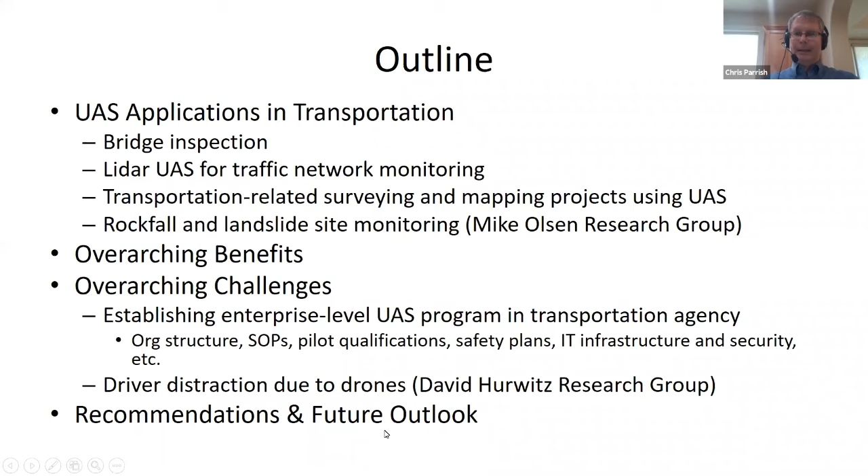Okay, another thing a little bit different about how I organize this presentation today. Usually I leave the list of grants to the very end, but I wanted to bring it right up front in this presentation. And the reason why is this.

Cole and Yinhai both mentioned that we did a multi-institution PacTrans project. The work I'm going to be presenting is actually a whole series of projects, and this is actually only a partial list. It doesn't include, for example, the projects of Michael and David that I mentioned just a second ago.

But the main reason I wanted to move this up front is I wanted to talk about the top line here. So right after I started here at Oregon State University, I started in 2014, and I think this was maybe the second grant proposal that I submitted.

It was with a colleague, Dan Gillins, who's now in NOAA NGS. We were very fortunate to get at the time a PacTrans small project, which was one of the PacTrans research types that Yinhai mentioned. This was really fortuitous, very appreciative of that.

Not a large dollar amount, but it allowed us actually to jump into UAS. This was even before the Federal Aviation Administration released its Part 107, so we were operating under something called a COA at that time. But that initial small project then led directly into several follow-on phases of research.

So about 6 years too late, maybe, I just wanted to say thank you to PacTrans. Since this is a PacTrans webinar, I wanted to express my appreciation for that first award all the way back in 2015 that kind of jump-started all of this work. And I would also encourage PacTrans to keep doing what it's doing and making those small projects available to new faculty.

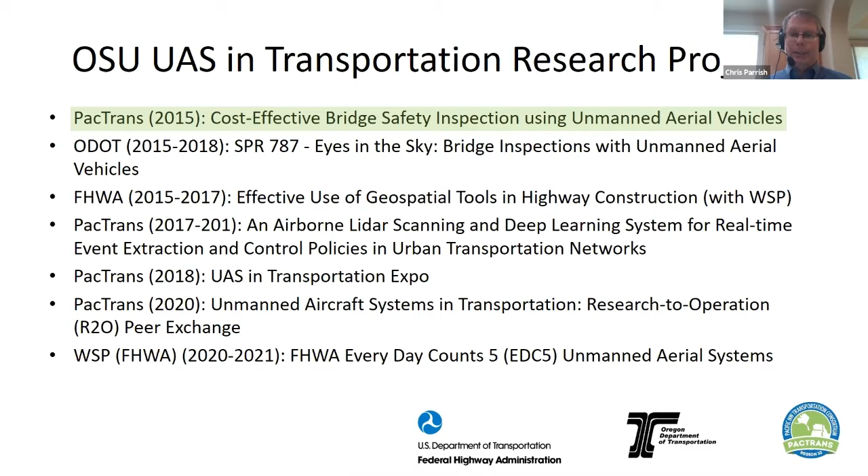Okay, so back to these different applications of UAS. The first one that I want to talk about is use of UAS for structural inspections, and in particular, I'm going to focus here on bridge inspection. So a question you might have right off the bat is why use UAS for bridge inspection?

But if you can reduce some amount of lane closures, traffic control, use of bucket trucks, snooper cranes, that can lead to potentially a huge cost savings over the course of a year, and potentially also some safety benefits as well.

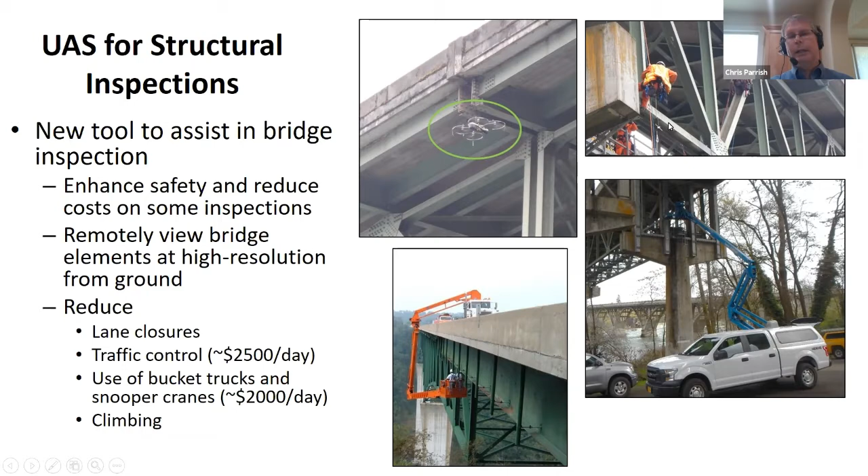By the way, just very quickly, the particular bridge inspection that we see here, this was a great one. This is Winchester Bridge down near Roseburg, Oregon, and not the image showing the snooper crane down at the bottom, but the other three images, those were all taken on the same day. So if you see our inspection UAS there, we were acquiring data on the same day that an ODOT crew was there on a different span, physically climbing on the bridge and using the bucket truck.

So when we first started this work, which I said was all the way back in 2015, which seems like quite a while ago now, one of the first things we did is we looked at what are the requirements of a drone, of an inspection aircraft, for doing bridge inspection type work. The particular aircraft that we see here is actually now obsolete, you can't even buy this anymore. But a lot of the characteristics of this one still remain today, characteristics that you would want to see in an inspection aircraft, and I'll talk about them briefly.

One of them is that you really want to use multi-rotor aircraft as opposed to fixed wing aircraft or gliders, things that operate more like a conventional airplane. Those ones tend to be good for acquiring data over large areas efficiently. But if you want to be able to hover in place up near the bridge and have the inspector zoom in on a particular element and capture, look at that from slightly different angles, maybe by tilting the camera, you really want an aircraft that can hover.

Also, vertical takeoff and landing is important. A lot of times in doing bridge inspections, you're operating in tight spaces, so you don't have a huge amount of room to take off and land. So things like the quadcopter shown here, or other multi-rotor aircraft, are really helpful.

The second thing is obstacle avoidance. The main goal here is you really just don't want to crash into the thing you're trying to inspect, right? You don't want to fly the drone into the bridge you're inspecting. Whenever I say that, people laugh. It sounds so obvious, kind of like, duh, right? But that can actually be tricky in practice.

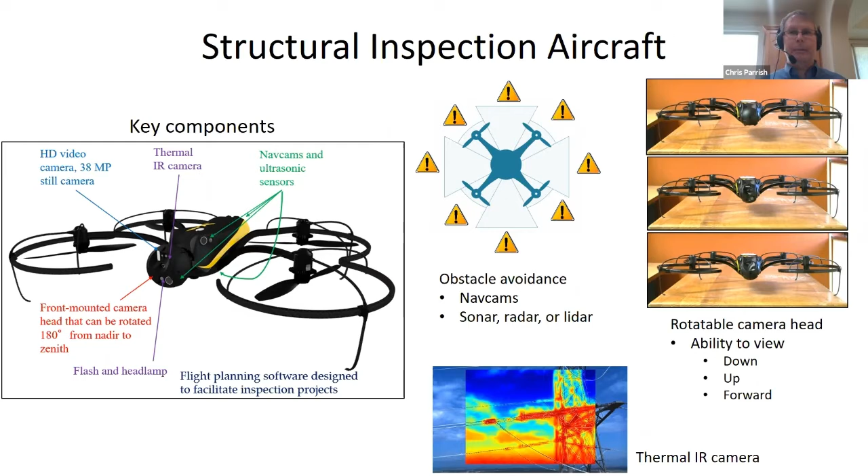Thermal imagery, or thermal IR, can also be helpful. I've got to say we didn't use it much, though this particular aircraft did have a built-in thermal camera. Other researchers have shown that it can be beneficial, for example, for detecting delamination in bridge decks. So this is a quick look at some of the bridges we inspected with the UAS during our first couple projects.

Independence Bridge was the first one we started with. I don't know why we picked such a hard one to start with. Independence Bridge is a fracture critical bridge, also very large, a difficult place to start, but nevertheless, that was the first one we did. We also did a couple bridges in Central Oregon, Crooked River Bridge and Mill Creek Bridge.

Crooked River Bridge is actually currently a pedestrian bridge only. They built a new bridge just to the east of the old one. That was really helpful because, based on ODOT's rules or restrictions for us, they didn't want us flying above the bridge deck. The reason for that is they didn't want a drone suddenly popping up above the bridge deck and potentially startling a driver, which is a real concern, and something I'll come back to when I mention David Hurwitz's driver distraction due to drones work. But since it was a pedestrian bridge, we could do some additional things there.

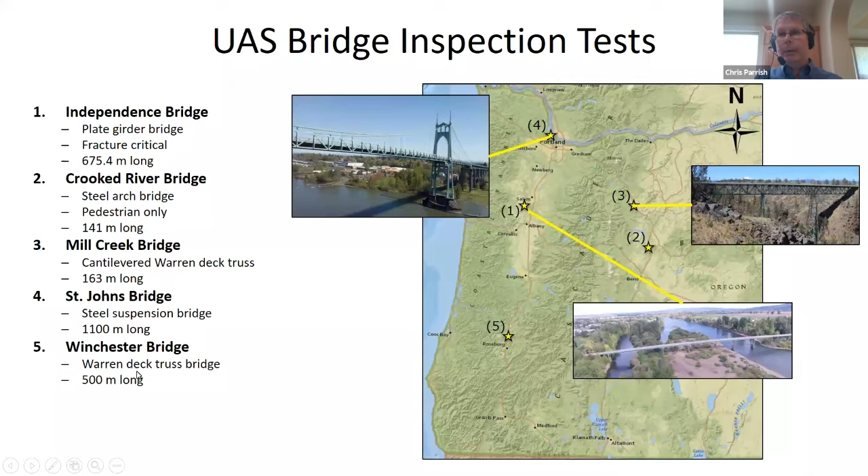From there, we went to St. Johns Bridge, a beautiful steel suspension bridge up in the Portland area, and then Winchester, the one I already mentioned, down in Roseburg.

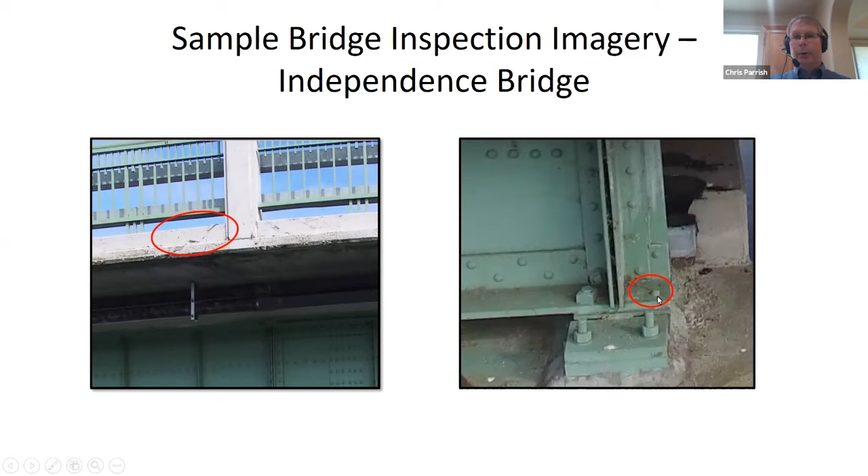I've given other presentations where I've shown examples of the imagery we collected, so I'm just going to go through these really quickly. We collected something like 4,000 or more images in these projects. I'll just show a few examples that the inspectors flagged for us as being of interest, like cracking in the concrete railing on Independence Bridge, and a missing bolt head that had been painted over here.

Looking at rocker bearing alignment, so is it vertical, or is it rocked over? Also looking at the pin connection in the lower chord there.

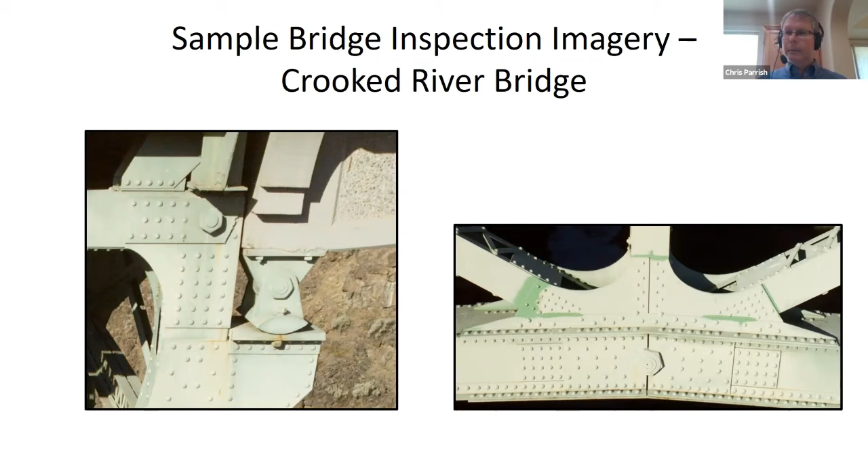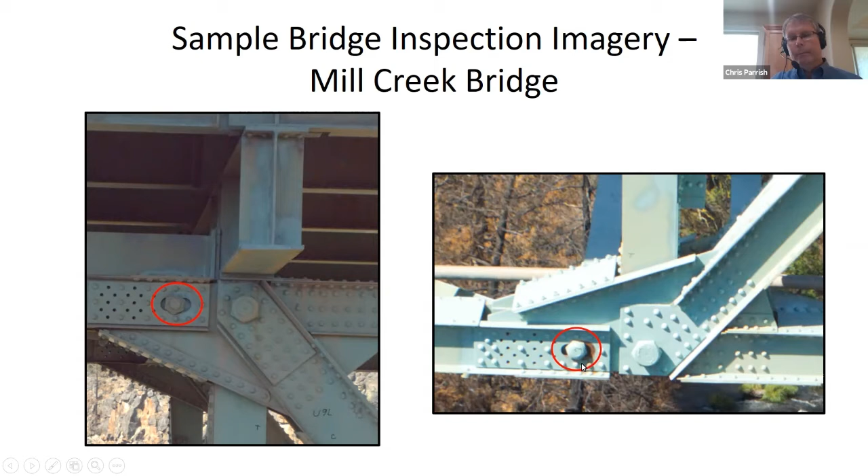This one was kind of interesting, from Mill Creek Bridge. Here we see no evidence of movement of the joint in the upper chord, but going down to the lower chord, you do see evidence of movement of the joint, both in terms of the rust and the location of the pin.

Winchester Bridge was the first one where we actually flew under the bridge deck looking up. This was really beneficial for these bridge inspections, but also, frankly, a bit scary to do.

The big issue when you fly the aircraft under the bridge deck is that you tend to lose GPS, or GNSS, Global Navigation Satellite System, signals.

And one of the issues with that is, well, it's making your navigation much less accurate. But the other thing that happens is when those GPS signals are coming in and out, if you lose them and then suddenly reacquire them, that can actually cause the aircraft to jump. The way I envision it is it suddenly realizes that it's over here when it should be over here. And so all of a sudden it will just jump somewhere else. And obviously that can be a bit scary when that happens.

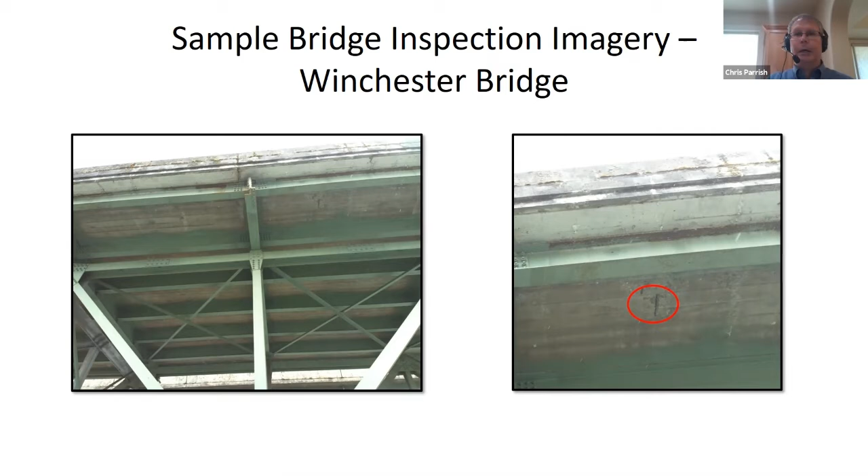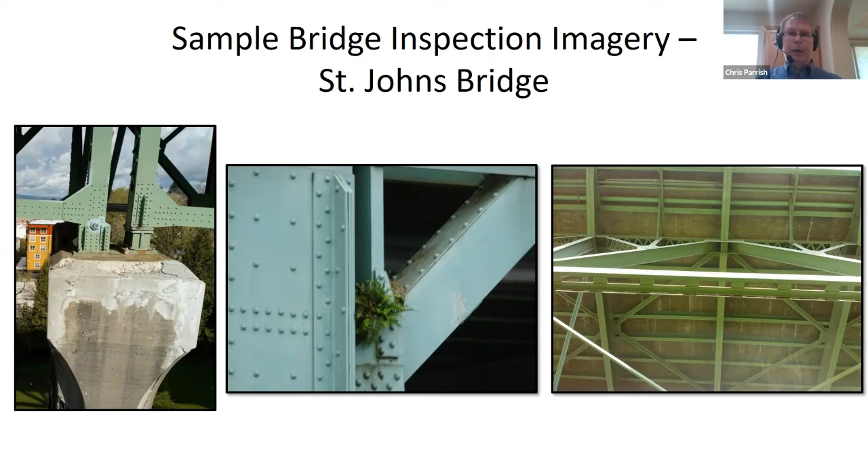Okay, so for the most part in those structural inspections, when we were working with the bridge inspectors, they had in mind to use the UAS kind of like a flying pair of binoculars. Basically, what they wanted to do was be able to take the aircraft up to a certain height, zoom in on a specific element, and do the things that they could do with a high power pair of binocs. Completely fine way to use the UAS. But one of the things we wanted to do in this project is actually document going above and beyond that.

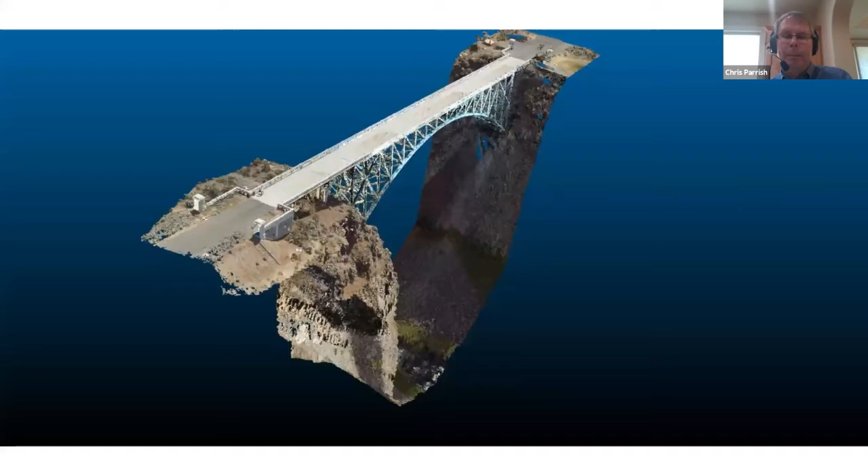And let me actually show you what that looks like. So if this is going to work, this is actually a video. So we've got a 3D point cloud of this Crooked River Bridge that was created from that 3D reconstruction and the Structure from Motion Photogrammetry software. Something I'll say about this is it might look like a solid 3D object. It's not. What we're seeing is actually comprised of millions, maybe tens or even hundreds of millions of individual points, each with XYZ spatial coordinates.

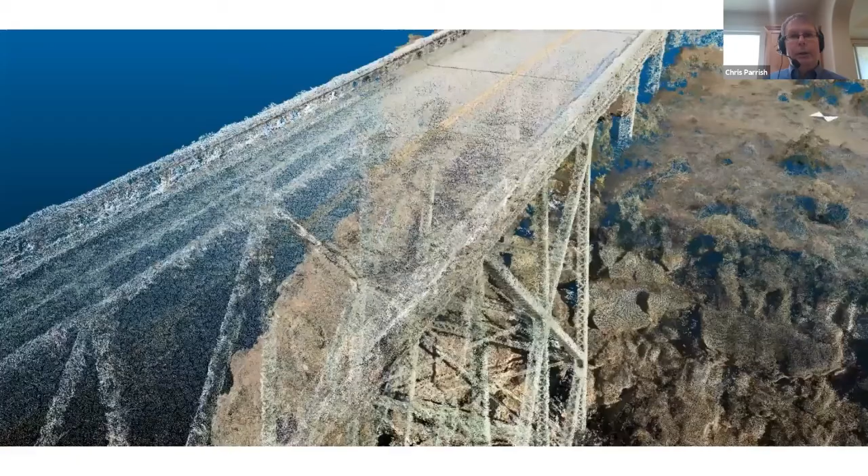I think you'll see this a little bit better as the video turns here. Hopefully you can see that each one of those things is an individual point in space. I'll give this a second to continue just because I think it's pretty cool. Former student Matt Jones created that. Okay, I'll keep going.

So what is the power of this? Well, having that kind of georeferencing where you've got that point cloud where each point has accurate 3D spatial coordinates, this gives you a way to link the 3D real world, this 3D point cloud, and then the 2D imagery. So if the inspector has a particular element they're interested in looking at, a particular pin connection, and they know where this is in the real world, or they can find it in this point cloud,

it's as simple as being able to click on that, and then you can bring up every single UAS image that saw that particular element or feature, whatever it is the inspector is interested in looking at. If the UAS acquired imagery of it from multiple different angles, flying heights, viewing geometries, whatever, you can pop up all those images.

So the final thing that we did in that bridge inspection work is we did a cost benefit analysis. And going in, I've got to say, this was the part of this study that I was initially most concerned about because I will freely admit I am not an economist. So we tried to be very conservative in how we did these cost estimates. Basically what we did is we took a spreadsheet that we were given of all the bridges that ODOT inspects in a given year. And we looked at what percentage of them would be suitable for a UAS bridge inspection.

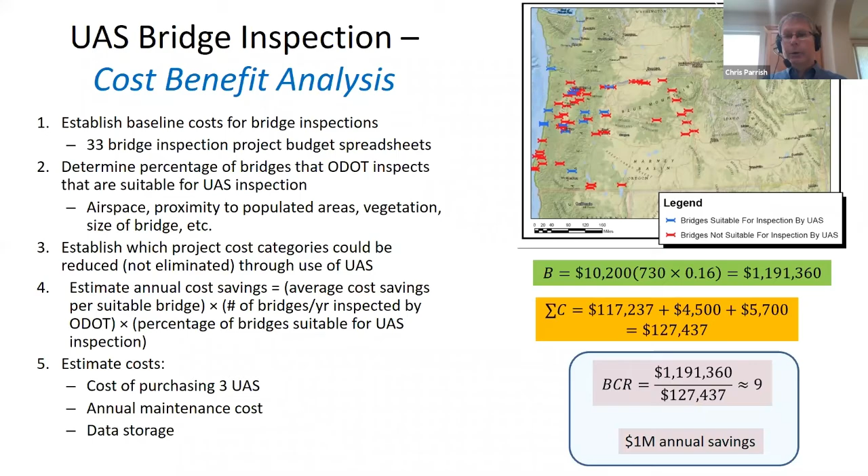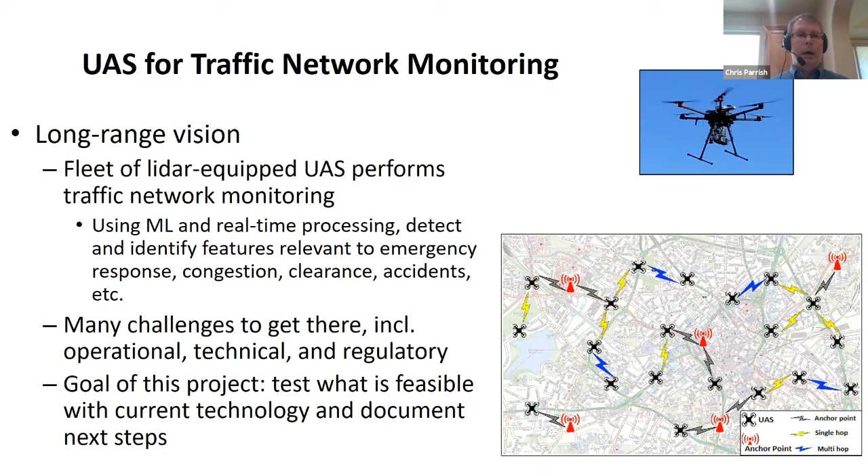So you might look at this and say, well, Chris, this is kind of pie in the sky. It seems kind of out there. I actually agree with that. I think this is kind of a long range vision. We're not really there yet. But I would also say that a lot of the current challenges in achieving this are actually not technological. They're a lot on the regulatory side. But anyway, our goal in this project was to see how far we can get in this direction, test what's currently feasible.

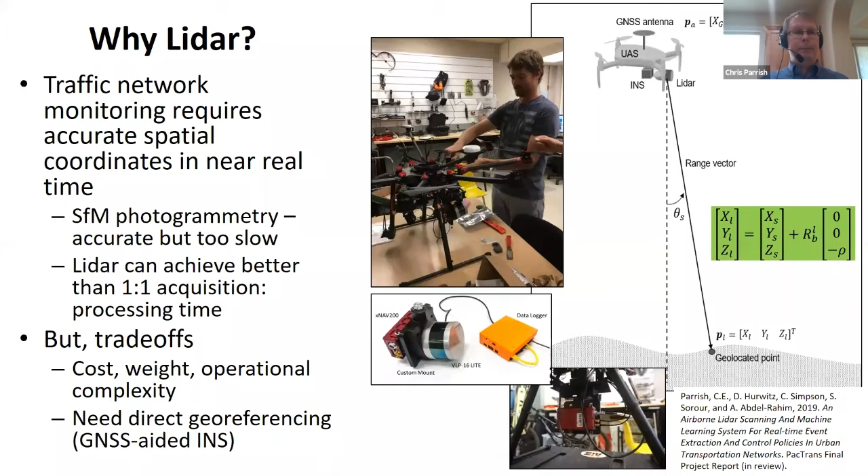Why use LiDAR with this? As I already showed, you can do the same thing using imagery. That was the Crooked River bridge example. The reason why LiDAR is so critical here is structure from motion photogrammetry using the imagery is just too slow. It processes for hours, depending on the size of the project. It can process overnight. Meanwhile, LiDAR can achieve better than one-to-one acquisition to processing ratios. So if you need real-time coordinates of things for this traffic network monitoring, LiDAR is kind of the way to go.

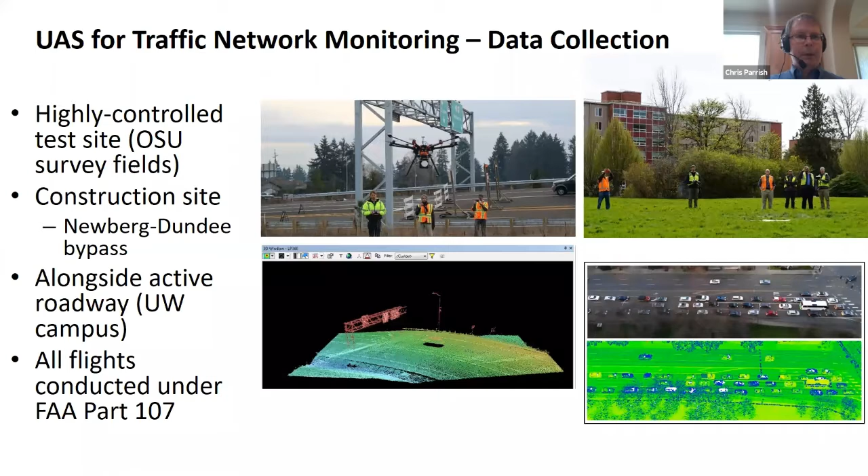So we equipped our LiDAR UAS. We did a number of test flights, starting with this highly controlled test environment on the OSU campus up in the upper right. From there, we moved on to a construction site, the Newberg-Dundee bypass construction site. We flew this right before the bypass was open to the public. And then the final test that we did was up at the University of Washington campus, flying near this traffic intersection. All the flights were conducted under FAA Part 107.

Okay, if this works, I'm actually going to bring this up in my browser. This is just a little video. When it starts, you should see the aircraft take off over here. So here's the aircraft. This is actually drone-to-drone footage. So you can see the LiDAR aircraft flying alongside the roadway. If it looks like the aircraft is actually over the roadway, that's just a matter of perspective.

I promise it's not. We followed David Hurwitz's recommendations in the driver distraction due to drone study that I'll talk about later. But anyway, flying along. Oh, one question you might ask in looking at this is, does the relative motion between the aircraft and the vehicles create distortions in the point cloud? The answer is yes, it does. So that's something that we had to take account of.

All right, let me lower that and go back to PowerPoint. Okay, so just a second.

As I mentioned, this was a multi-institution project. Our project partners were at University of Idaho. And the part of this that they led that was kind of cool was coding up this machine learning algorithm for auto detection of vehicles in the scene. And the goal here was to try to make this efficient enough that it could run in real time. So they're doing this sort of parallelization of the scanning and then the data processing. Here's a template of a vehicle. So this was kind of a template matching approach, but utilizing machine learning.

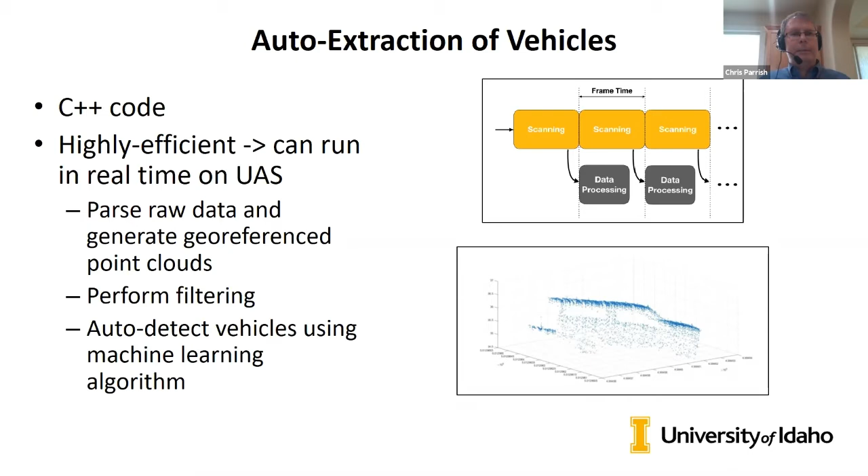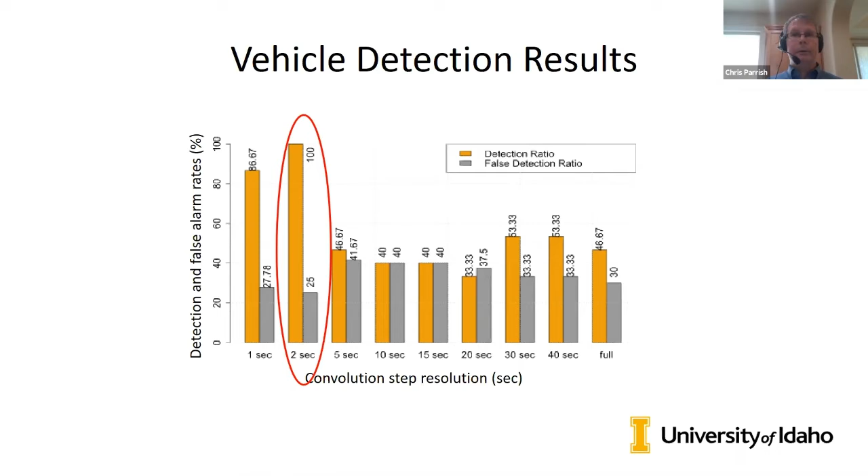Just really quickly summarizing their results from that. And I did sort of pick out the best set of results here, but they were able to achieve up to a 100% detection rate with a 25% false alarm rate by carefully choosing the settings in their processing algorithm. The most important thing about this, though, is this is all, again, done in a way that it's designed to be efficient enough that you can run this in real time on the type of processor that you could put on a UAS. Another thing that we did in this project, let's see if this one runs.

Oh, there it goes. So here we've got, over on the left, just a static image of the setup that we had. So this is over an intersection, 14th Street and Monroe Avenue, just right across from my office, actually. Looking over this intersection and doing the scan as vehicles were passing through the intersection. I don't know how well you can see it. With this particular scanner with 16 beams, the spacing between the beams gets larger as you get further away from the scanner. But hopefully you can see, as the bus, for example, goes through the intersection, you can detect it there.

This leads to a question. So do you actually need UAS for this type of traffic network monitoring with these sensors? And I think that's a really good question. This is just my personal thought, but I feel that the future of all of this is that if we are able to get this type of traffic network monitoring system, it's going to be probably a combination of fixed mounted sensors that are on poles or signs or overpasses or something like that, along with UAS.

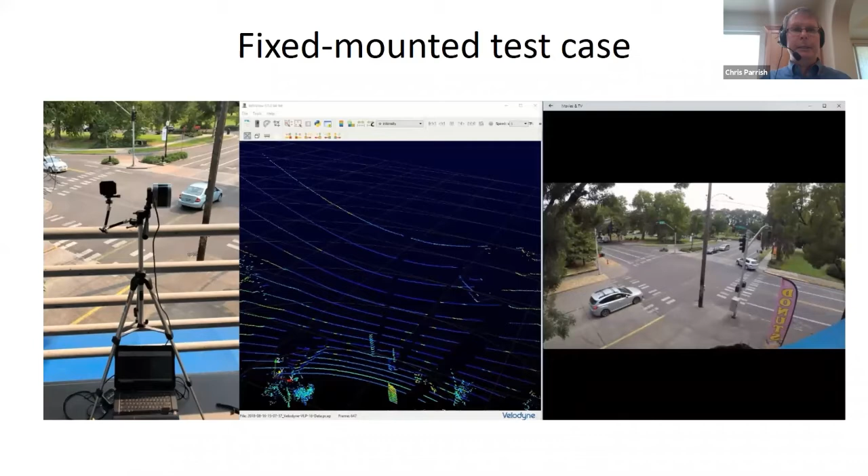The thing that the UAS brings is if you're trying to go inspect an accident site or something like that, and it happens to be in between these fixed mounted sensors, the fixed mounted sensors just don't have that ability to move. But I think that ideally, in the future, if we can get there with regulations and other things, this combination of the fixed mounted sensors and then those mounted on UAS is probably the most powerful solution.

Okay. Another great thing that PacTrans does, by the way, is it requires all PIs to make their data available. So if anybody is interested in the data from that traffic network monitoring project with Lidar UAS, we've got the point clouds in LAS and ASCII formats, metadata, our final report, our video, all of that is available for download.

Next set of applications, near and dear to my heart, surveying and mapping. So there are a lot of transportation related surveying and mapping type applications that UAS can be great for. The big focus here is, unlike in other applications where you just need quote unquote pretty pictures or nice imagery to analyze visually, in surveying and mapping, we really care a lot about things like spatial accuracy, spatial resolution, datums, coordinate systems, map projections, units, having good survey control.

So what do? Well, first of all, let me back up a second. Two ways that we can collect surveying and mapping data using UAS, two technologies. I've already kind of mentioned them, but I'm going to go into a bit more detail here. So we've got imagery, just kind of like, I don't know where my cell phone went, red, green, blue imagery, like the kind that I could acquire with my phone, maybe a little bit better camera, hopefully a much better lens. But flying over the area, collecting imagery, putting that in the photogrammetric software, creating point clouds like the one of Crooked River that I showed earlier.

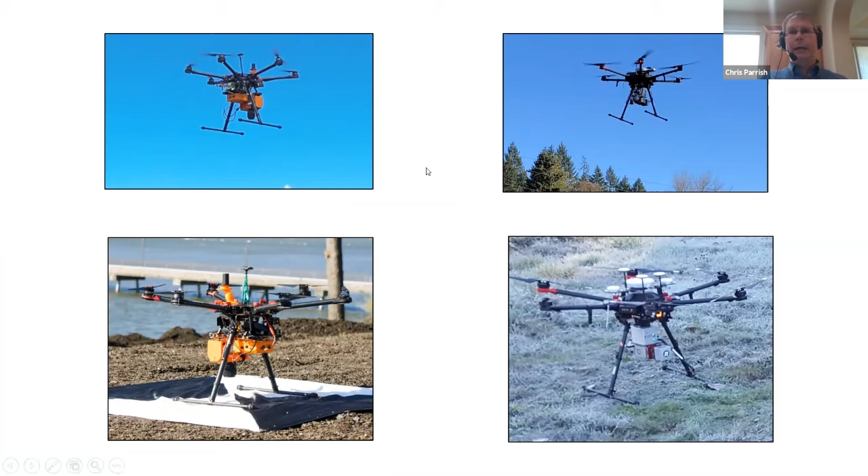You do need bigger, heavier systems. I'll kind of show you why. First of all, just an example, a couple different examples of LiDAR UAS over on the right, and then UAS equipped for acquiring imagery on the left.

Kind of deeper than I want to go, but I'll talk about this quickly. I actually teach a class in photogrammetry, and we talked a lot about this back in winter term. How does this even work when you're doing the 3D point cloud generation from imagery? Well, you do the UAS flights, and you've got to have a lot of overlap. Each consecutive pair of images has to overlap by quite a bit, 75% or more, with the previous image. And then for flight strips, you need overlap side to side too.

You throw this into software, it creates feature matches. You also put in ground surveyed ground control points and camera parameters. It goes into a big least squares adjustment, and you get out a sparse point cloud. It then goes through another type of software called multi-view stereo, and you get a dense point cloud like the one for Crooked River Bridge that I showed.

You can also produce other products, like ortho images, which are images that have had the distortions removed and can be used like a map. Usually they're georeferenced, so every pixel has precise spatial coordinates. You can also output digital elevation models, 3D meshes, etc.

On the other hand, LiDAR, I already showed that cartoon of how LiDAR works, combining the ranges with GPS and scan angles to get point clouds. The main point I want to make is LiDAR has greater requirements to be able to get those accurate spatial coordinates. First of all, you need more hardware on the aircraft. You need something called direct georeferencing, or GNSS-aided inertial navigation system.

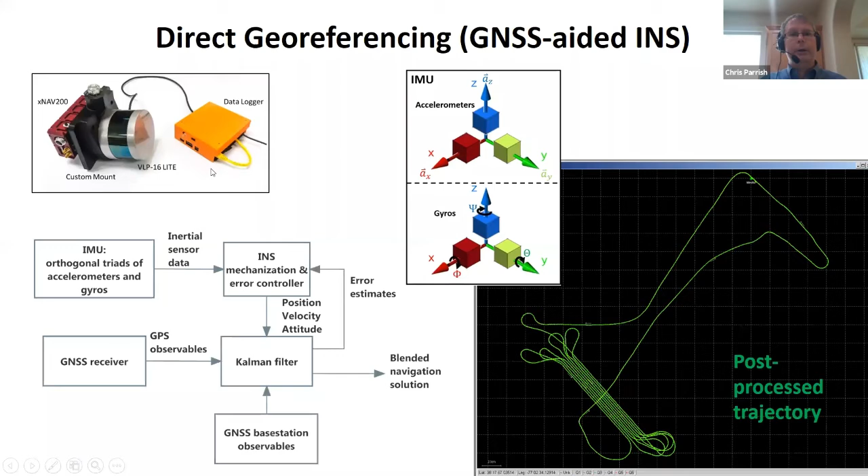I won't go into detail what that means, but suffice to say, you've got another piece of equipment that's got to be mounted on your UAS, and you've got to process the trajectory. You need good GPS for this. I'm guessing a lot of people have heard of RTK, real-time kinematic, or PPK, post-process kinematic. You might have heard of PPP, kind of new and emerging, precise point positioning.

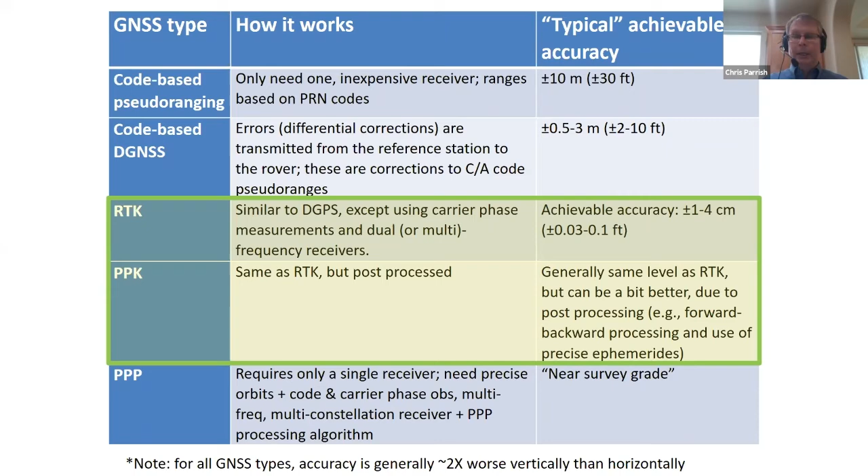People will refer to this as quote unquote survey grade GPS or GNSS, where you're getting down to accuracies on the order of a few centimeters. You really need this for doing UAS-based LiDAR.

This leads into a great study that I'm just going to show really quickly. This was done by a former grad student named Chase Simpson, who is now actually an instructor of geomatics at OSU in the School of Civil and Construction Engineering, and I'm really glad to have Chase as a colleague now. But this was back in his grad student days. He came to me with this project he wanted to do, and he said it was going to answer the question of which is better, UAS LiDAR or UAS imagery and structure from motion photogrammetry.

I loved this topic right from the beginning, but I remember saying to Chase, this is kind of unanswerable. Anytime you get one of these questions like which is better, technology A or technology B, the answer always comes out to be it depends, right? And Chase said, oh yeah, I know that, but I feel like we can do a good study and compare these across multiple dimensions: cost, accuracy, complexity, learning curve, etc. And I said, okay, it sounds great, go for it.

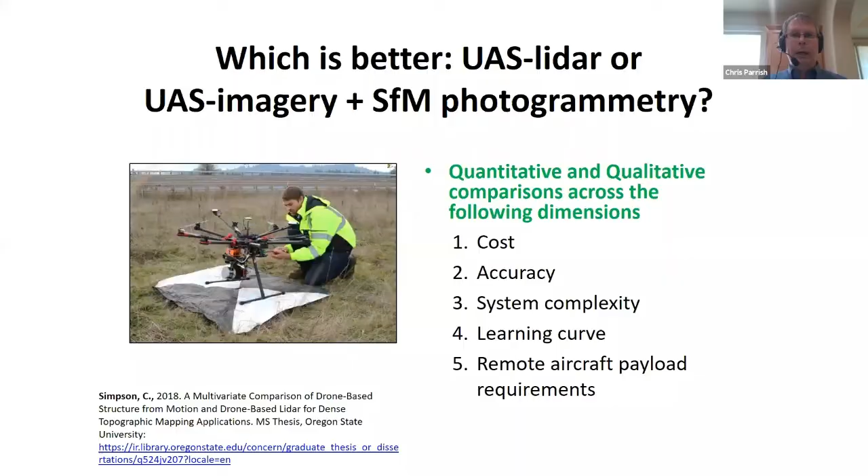So Chase did this fantastic study and survey. He did this really accurate control survey up in the Port of Skamania in Stevenson, Washington, along the Columbia River. So you can see his control survey. He acquired data with multiple different UAS and also terrestrial 3D laser scanning on different surface types, so sparse grass, concrete, asphalt, all these different surface types.

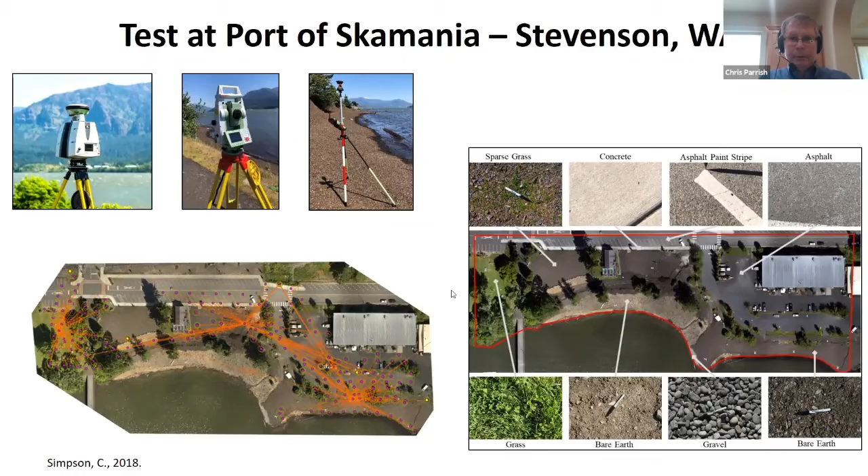Okay, I'm trying to advance the slides. Okay, so some of Chase's findings.

One of the really interesting things is looking at achievable point densities between these technologies. With LiDAR, we were getting point densities of around 50 points per square meter, which sounds pretty good, except when you look at what you can get from the imagery, it's over 5,500 points per square meter.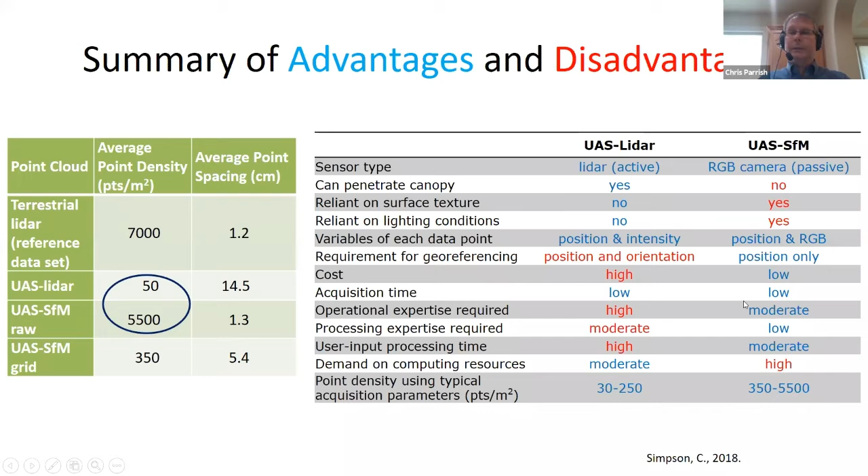Also, as I mentioned, LiDAR has greater complexity, greater cost, is a lot heavier, and has a steeper learning curve. You can see this table of trade-offs here, summarizing a ton of great work that Chase did very quickly. But basically, the conclusion Chase came to is that for a lot of surveying and mapping applications with UAS, including those of interest to transportation agencies, the imagery-based approach, UAS imagery with structure from motion photogrammetry, tends to be the method of choice. You might want to consider that as the default. It's low cost, easy to implement, and has comparable accuracies.

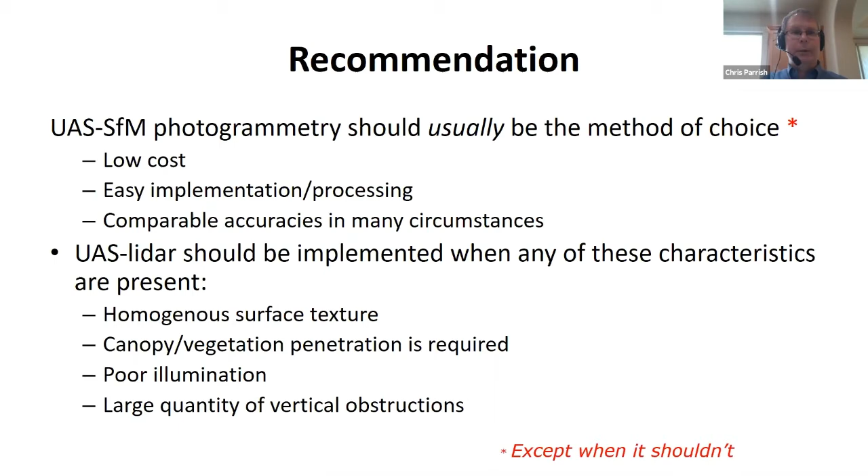That said, and this is really interesting, one of Chase's main findings is that there are certain cases when the imagery solution is not preferred, and you really want to go to UAS-based LiDAR. What are those situations? One is when you have a uniform or homogeneous surface texture. Another is when you've got canopy vegetation and you need to, quote unquote, penetrate through the canopy to get down to the surface. LiDAR tends to be good at that. Penetration is kind of the wrong word - it's not that the laser light is actually going through a tree leaf or branch, but if just part of that laser light can make it through to the ground below, you tend to be able to get ground elevations. Poor illumination and a large number of vertical obstructions, like trees and buildings, are also cases when you might want to use LiDAR.

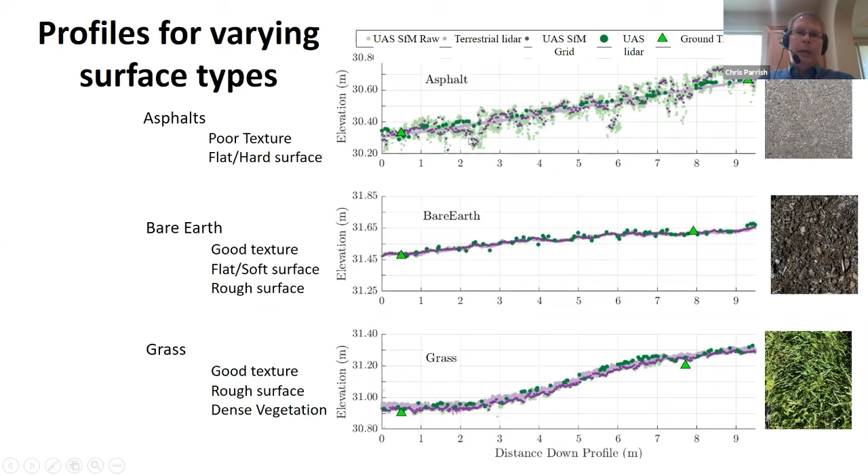One of the real areas where SFM struggled a bit is, as I said, on these uniform, homogeneous surface types like asphalt. Here we're looking at three different surfaces: asphalt, bare earth, and grass. The bare earth and grass have more texture to them. If you look at all the data, including the structure from motion photogrammetry in light green, and the LiDAR and ground truth, for the bare earth and grass everything agrees pretty well. But if you look at the asphalt, that imagery-based approach shows a lot of scatter - it really just didn't do as well.

This leads to the work of another fantastic former graduate student, Richie Slocum, who got his PhD about a year ago. Richie built this amazing thing which we ended up calling simUAS. I think this is just super cool, and I don't take any credit for it - this was Richie's idea from the beginning. It uses computer graphics software, CGI software similar to what's used in making animated films, to create a virtual scene.

You take a digital elevation model, any kind of topography you want, and drape whatever texture you want over it. You can change the illumination using custom scripts that Richie wrote. You can also add camera lens distortions and other types of effects. Then you create all these individual camera stations - the little yellow dots in the upper left represent 3D locations from which a simulated image is taken. And then you generate this database of imagery.

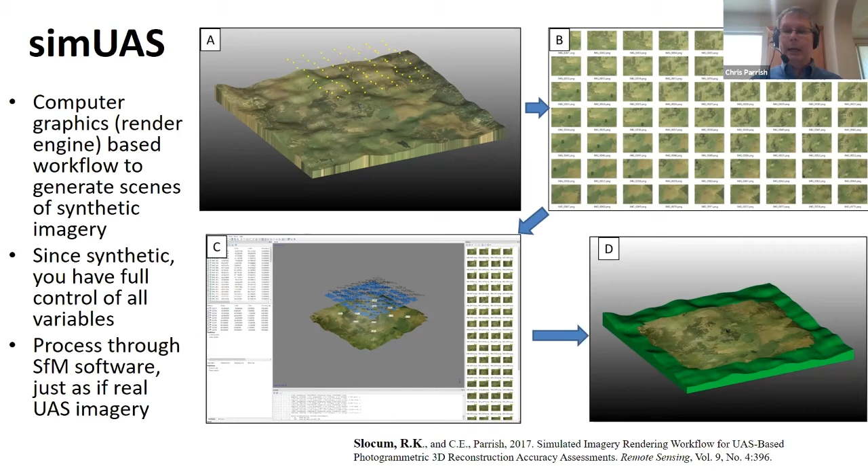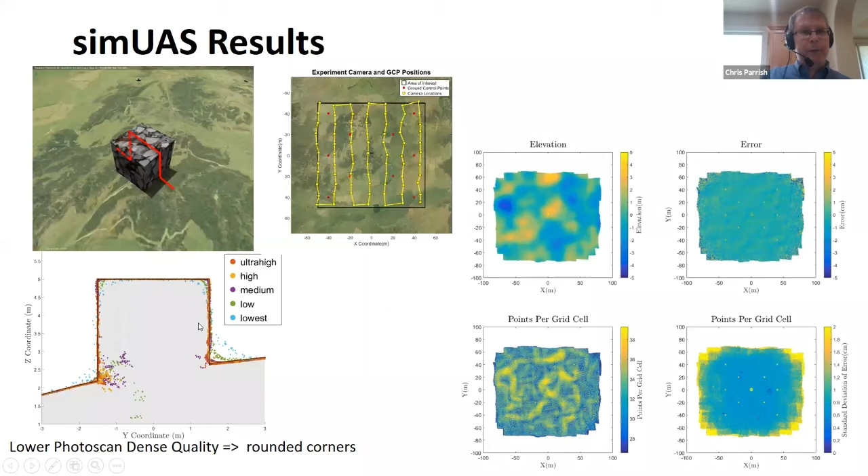Super cool. Here's an example. In this case, Richie placed the simulated block in the scene, and then you can see the points from the different SFM reconstructions and see how accurate that is.

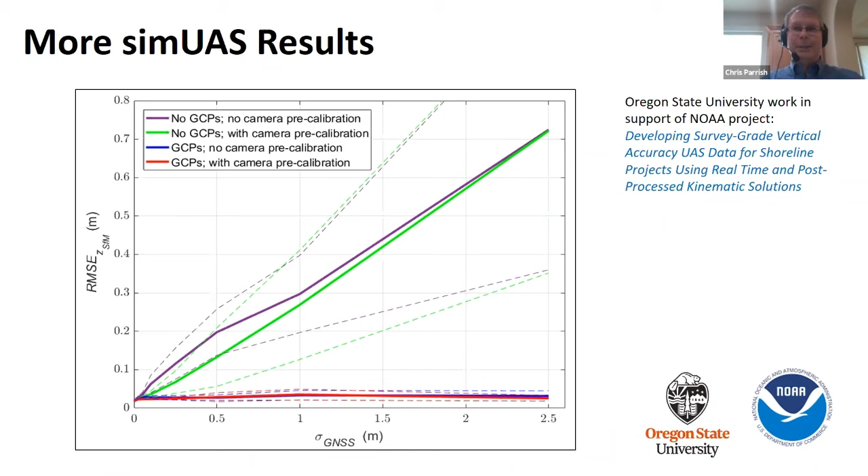In another project, I've got the NOAA logo here. This is a project we're currently doing with NOAA, looking at the vertical uncertainty of those structure from motion point clouds as a function of the drone's GPS. A really cool thing we can do, and we're currently looking at validating that through some field surveys.

I think this is the final application I was going to mention, and this is back to one that is not my work. This is work of my colleague Mike Olsen and another colleague Ben Leshchinsky and former student Ben Babbel. They've done a lot of work looking at UAS for rockfall and landslide site monitoring using both UAS and imagery-based approaches like I just talked about. This is the Spangler landslide.

It's part of the Mulino landslide complex about 22 miles southeast of Portland, a large landslide complex that Highway 213 passes through, and that's caused a lot of damage to the highway at various times. So basically, and then also rockfall site monitoring.

Mike goes up every year to Alaska and does data collection on these rockfall sites. I got to go up there once, a lot of fun.

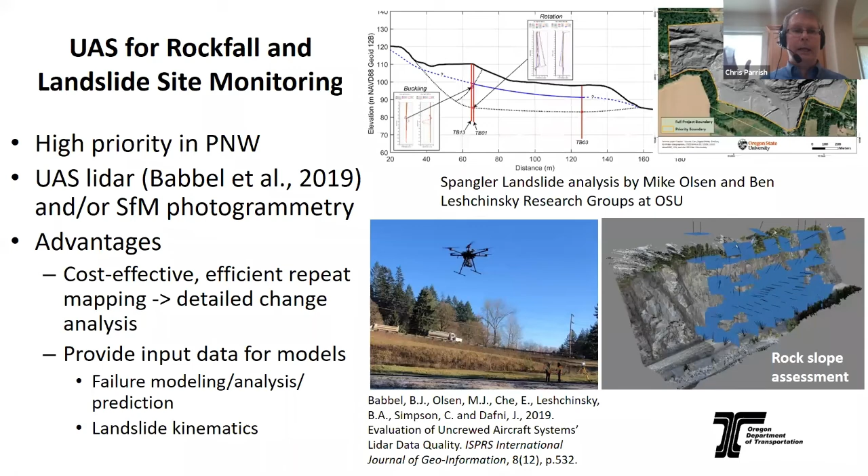Some of the things they found: UAS Lidar can be a cost-effective, efficient method of repeat mapping and monitoring change. This type of thing can provide input for models, failure modeling, analysis and prediction, looking at landslide kinematics.

So with all of those applications in mind that I just went through relatively quickly, I apologize. What can we say? What are the benefits of UAS for transportation?

I would say there are a lot, and they generally fall into these broad categories: cost, efficiency, safety—things we saw in the bridge inspection and the rockfall site monitoring—and multi-use of data, by which I mean the ability to collect data for one specific project, but then turn around and use it for a whole host of other things, some of which might not have even been envisioned when the data were first acquired.

We've shown that UAS are already efficient for bridge inspections, and by the way, this is kind of already operational. I don't want to overstate our credit in this—a lot of other groups have done research on UAS for bridge inspection, and this is slowly starting to become more and more an operational capability.

Other transportation-related structural inspections—I didn't really mention this, but at the time we did that follow-on to the first PacTrans project, ODOT wanted us to look at communication towers as well, so we did that. I talked about the landslide and rock slope monitoring in Mike Olsen's work, and again, just a whole host of transportation-related surveying and mapping type projects.

Transportation construction site monitoring—yet another colleague I haven't mentioned yet, Yelda Turkan, is using UAS for construction site monitoring. And things that are coming in the future: traffic network monitoring, infrastructure monitoring.

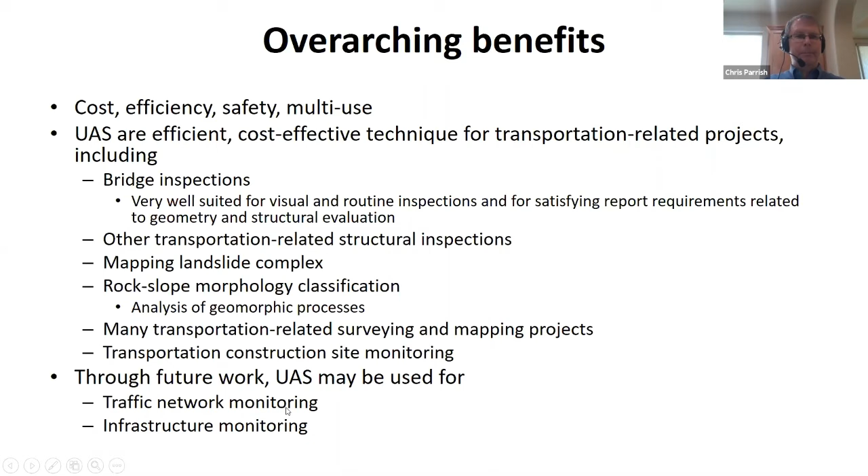Okay, challenges though—there are quite a few as well. For a large state transportation agency trying to operationalize UAS, things like pilot qualifications, proficiency, safety for both the UAS flight crew but also for motorists, regulatory issues beyond visual line of sight, airspace, and night operations.

Just back in April, the FAA released new regulations that facilitate a bit things like flights over people and over moving vehicles and nighttime operations beyond visual line of sight. As of right now, you need to be able to keep the UAS in unaided line of sight. That's one that a lot of people are hoping is eased up on a bit.

IT—collecting huge volumes of data. We collected literally terabytes of data during that bridge inspection work. Along with that, the idea of all the processing that needs to go on, IT security, other IT-related issues. Let me quickly talk about this one though: the driver distraction due to drones.

Again, this is David Hurwitz's work, and I wanted to mention it because in the past, when I've given presentations on this research, even if I just barely mention David Hurwitz's driver distraction due to drones, when I get to the Q&A session, all of the questions seem to be on David's work. We'll see if that's the case today as well.

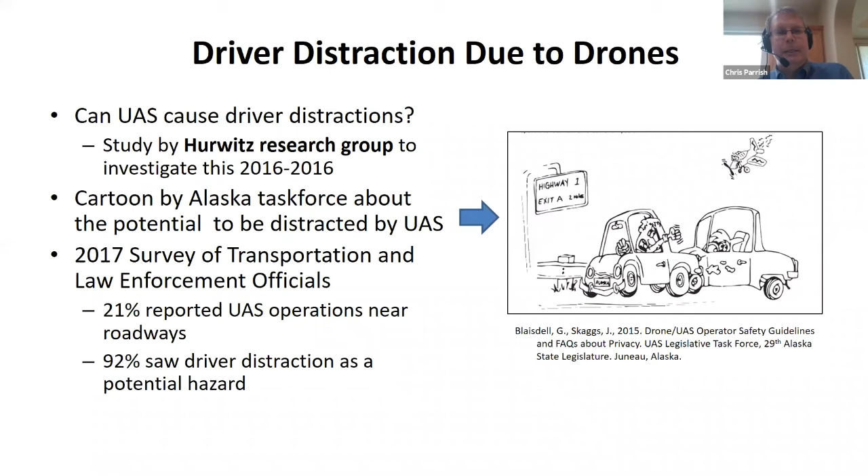But I just find this fascinating. Here's a little cartoon by an Alaska task force about the potential for drivers to be distracted due to UAS. It was a 2017 survey of transportation and law enforcement officials in which 21% reported UAS operations near roadways and 92% saw driver distraction as a potential hazard.

So what David and his students have done is investigate this rigorously using their driving simulator. By the way, I don't know if David is on the line today. He might wince as I try to explain some of his research. If I get anything wrong, maybe he'll be able to correct us after the fact.

But he's got this driving simulator, a 2009 Ford that the driver sits in. And what makes this really rigorous and quantifiable is they can actually track the eye movements of the driver. So this isn't just subjective analysis where they ask the driver after the fact, hey, did you see the drone? They can track it.

So they can put the simulated drone in different environments, urban or rural. They can look at the total fixation duration and dwell duration. They did this with a bunch of different subjects.

And by the way, the reason this is important is that studies have shown that glances of greater than 2 seconds away from the road nearly double the near-crash or crash risk.

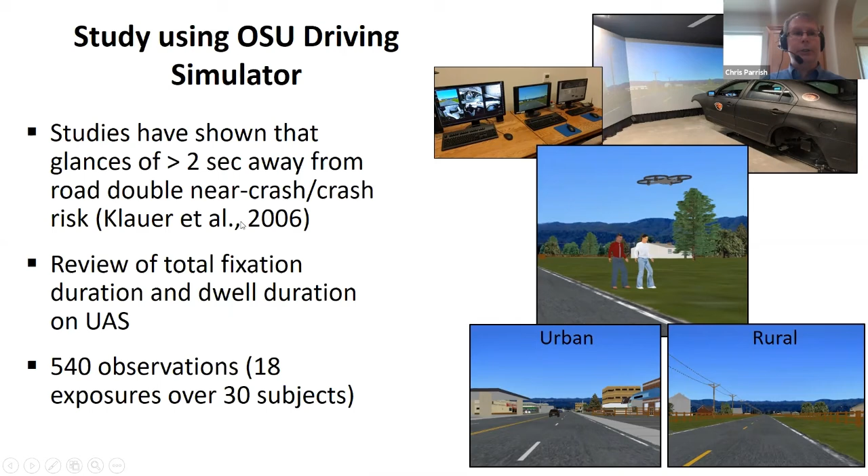So some of the findings from the work that David and his students have done: UAS operations near the roadway do induce quantifiable glances away from the roadway. Recommendations prohibit UAS operations within 25 feet of the roadway. That was how we knew how far back to stay from the roadway in some of those Lidar UAS flights that I showed earlier.

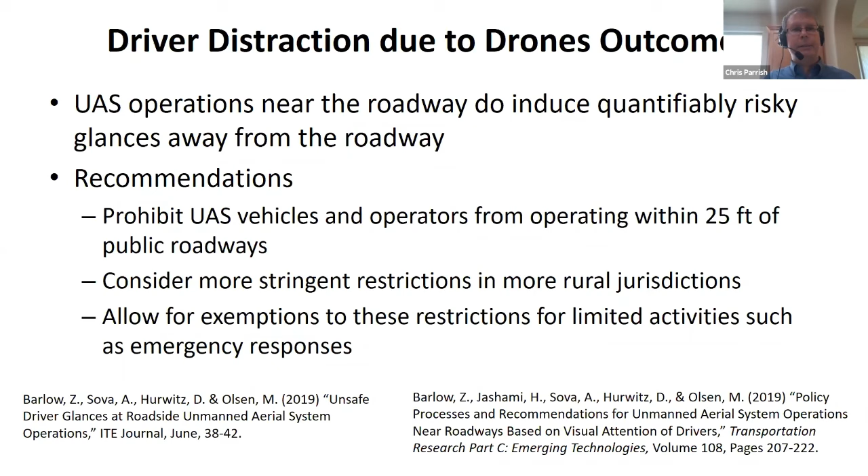Consider more stringent restrictions in rural jurisdictions, possibly allowing exemptions for limited activities such as emergency response. As a follow-on to that, David and his research group looked at whether UAS distractions can be mitigated through signage. They've looked at different sign designs, including the wording and pictorial elements of the signs.

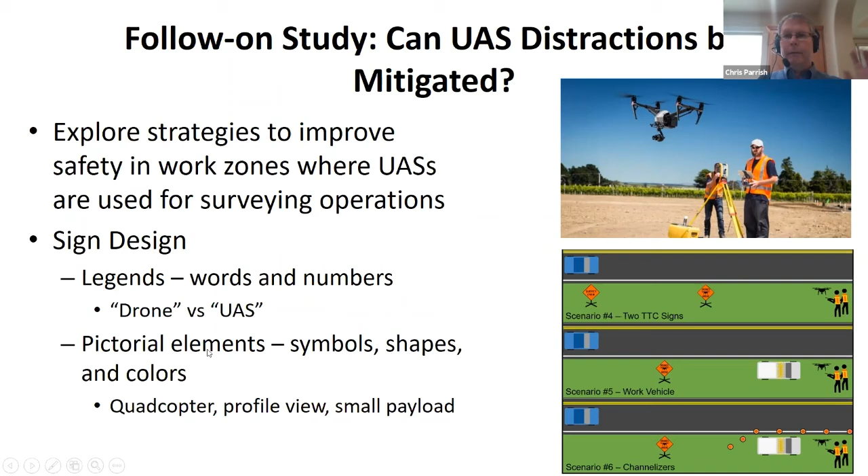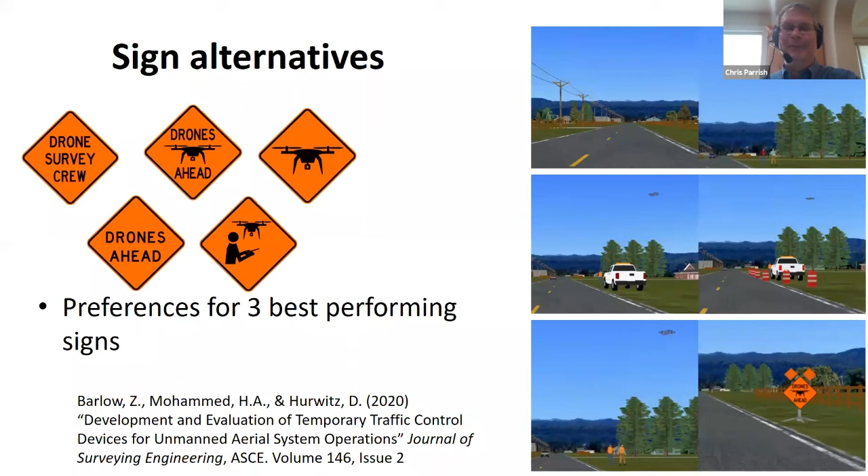So they've looked at these different sign alternatives and come up with the 3 best performing. Before this comes up in the Q&A, I'm sure somebody's going to ask me which ones were the 3 best. I meant to look that up before the presentation. I don't know, but if David's on, he can tell us which 3 were the best.

Okay, kind of wrapping up here. I know I covered a lot of ground, but best practices and recommendations stemming from this whole range of different projects we've done looking at UAS for transportation applications: one is for a state agency getting into work with UAS. We strongly recommend establishing a formal UAS program with standard operating procedures to, among other things, codify operational decisions. That was something we found early on.

You kind of don't want your flight crews getting out into the field doing a bridge inspection, for example, and looking at each other and saying, well, it's kind of windy. Is it too windy? Can we operate today, or do we call it? What's the max wind speed? There are a ton of others, that was just one example, but things you want to document and have codified ahead of time, so you're not requiring people to make challenging safety-related decisions in the field.

You want a defined organizational structure with roles and responsibilities, safety plan templates, airspace authorization procedures, pilot qualifications. A lot of groups are going above and beyond. The FAA Part 107 qualification is usually the minimum standard, but a lot of organizations are now doing additional pilot training and having additional pilot currency requirements.

In the field, you want to use a visual observer. That's actually not required strictly under Part 107. But for example, if you're doing a bridge inspection with the UAS and the operator is using first-person view, using imagery from the perspective of the UAS to maintain that safe standoff distance, the FAA in that case requires that you have a visual observer who has unaided visual line of sight to the UAS.

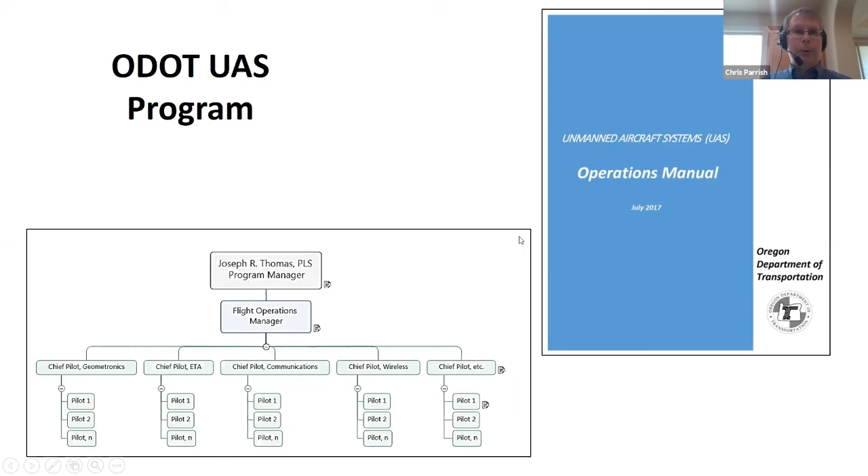Looking ahead, what's next? In terms of the aircraft themselves, things like these hybrid aircraft that can do vertical takeoff and landing, but then convert to a fixed wing aircraft. A colleague of mine, Mike Starek, who's at Texas A&M Corpus Christi, we've got a project with him where they're flying this aircraft. Really interested in that.

Things like better direct georeferencing, as I mentioned earlier, that GNSS-aided inertial navigation system on the drone. Obstacle avoidance - I see a lot of machine learning and computer vision coming in to do more and more with things like automated obstacle avoidance, new sensor types, hyperspectral imagery, and autonomous flight in areas where you're not getting good GNSS, like under the bridge deck.

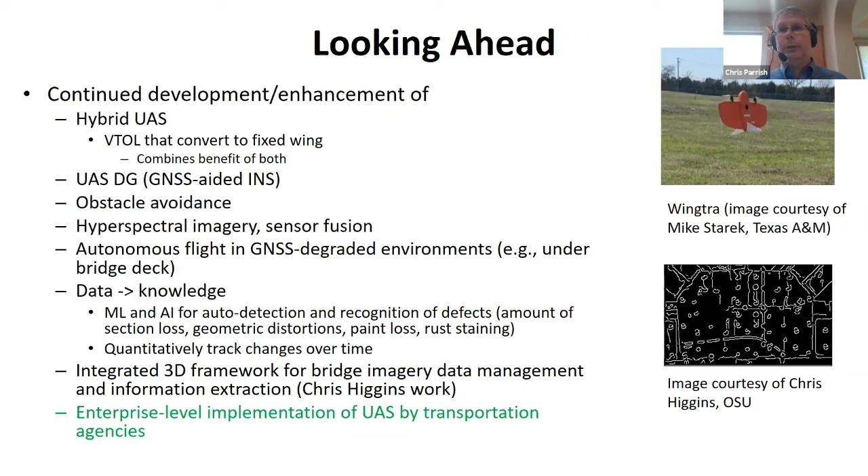And then the biggest one, I really see a lot of work coming in machine learning, artificial intelligence, and taking these huge volumes of raw data and turning that into information. Being able to - this is an image from a colleague, Chris Higgins here at OSU - automatically detect defects and automatically detect change over time. That is going to be huge as we collect larger and larger volumes of imagery. There's no way a transportation agency could realistically pay for a whole team of human analysts to sit there and look one by one through these huge imagery databases. This has got to be automated. So those are things that I see are coming.

Okay, references. I believe Cole and Yinhai said that these slides will be available. I don't expect you to read all of this, but a large number of publications have come out of this work, and I'd be more than happy to follow up with anyone who wanted more information on any one of these studies.

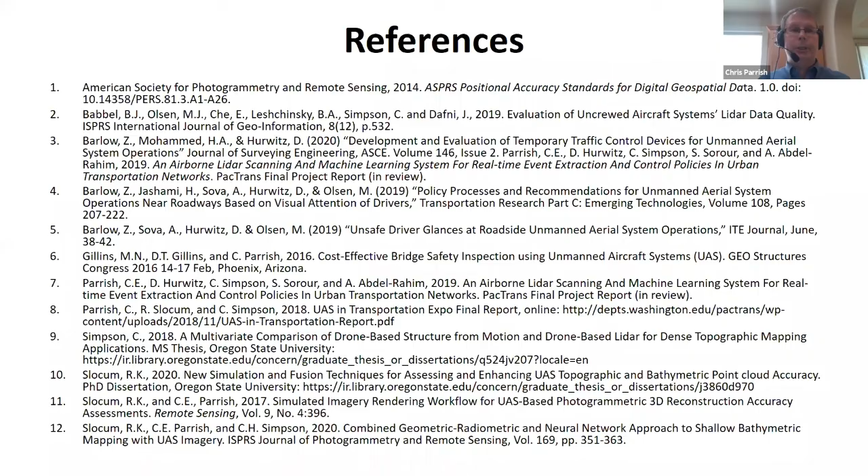And with that - I do apologize for covering so much information so quickly, but hopefully that was useful. And in the time remaining, if it's okay with Cole and Yinhai, I'll be happy to answer any questions.

Yeah, that was great, Chris. That was a lot. Thanks for all the plugs for PacTrans, and we're certainly proud of the way that our resources have been leveraged and what that's all led to. So this is fantastic.